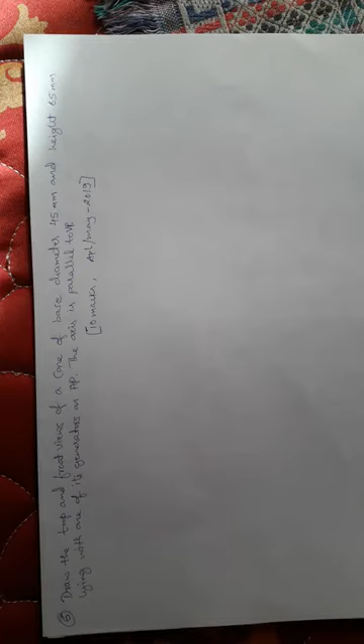Dear student, this is problem number 6. Draw the top and front view of a cone of base diameter 45 mm and height 65 mm lying with one of its generators on HP. The axis is parallel to VP. This is a 10 marks problem. This question was asked in April-May 2019.

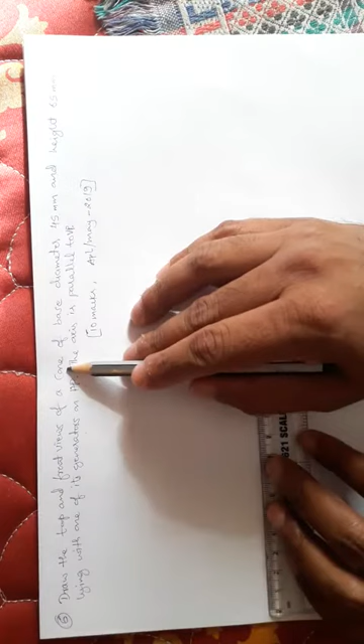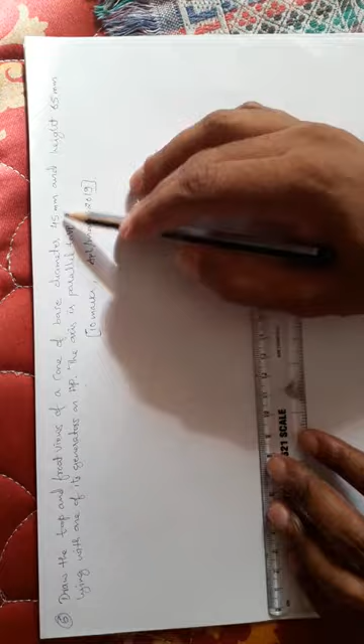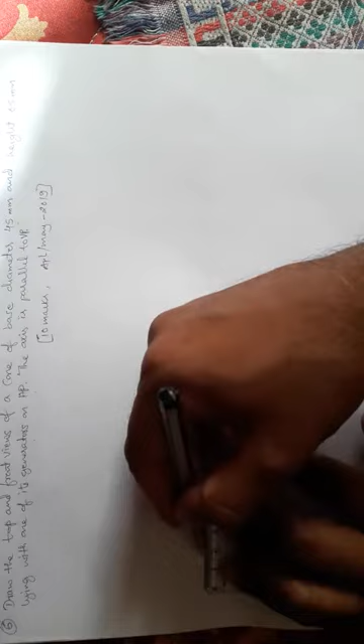So the problem is based on a cone and its base diameter is 45 mm. That means if the diameter is 45, we should take 22.5. Now I am going to draw the XY line. X, Y, and this is VP by HP. So the base diameter is 45 mm. I am going to take the radius 22.5.

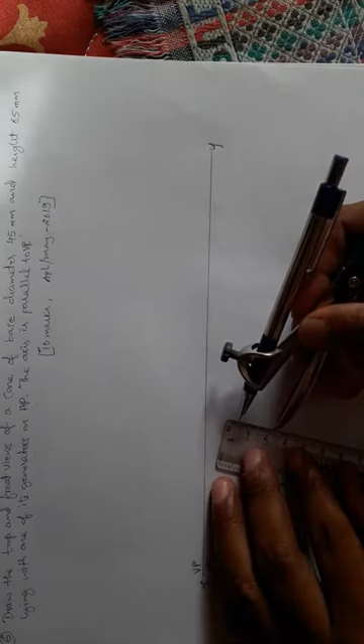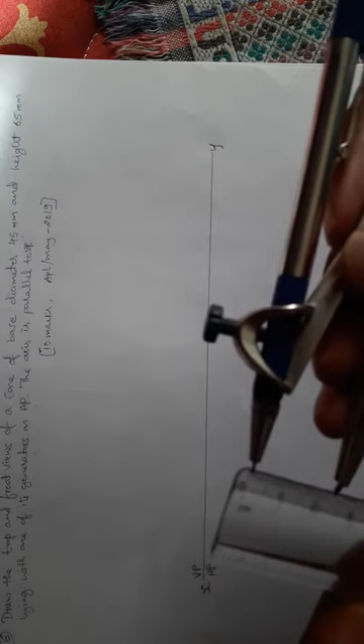So this is the 22.5, from here to here 22.5. I am going to make a center point. Okay, draw the circle of diameter. So this is the 45 mm diameter circle.

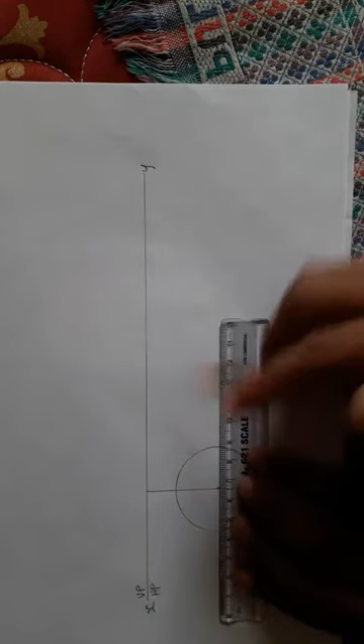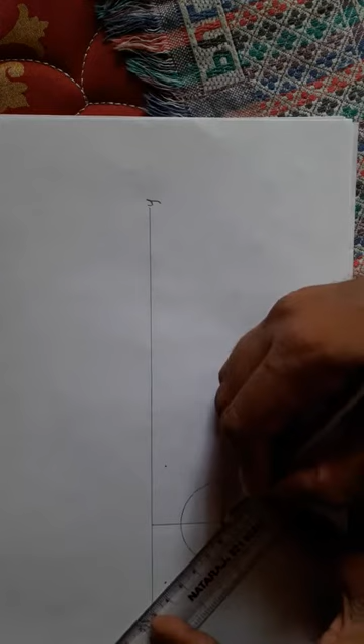From this center point, draw the vertical line to meet the XY line. The vertical line should be perpendicular. And draw the horizontal line from this center point, parallel to the XY line. So there are 4 points, and here I am going to make one more point: this is the 90 and this is the 45. Similarly, this is the 90 degree, 45 degree. I am going to make another line for reference purpose.

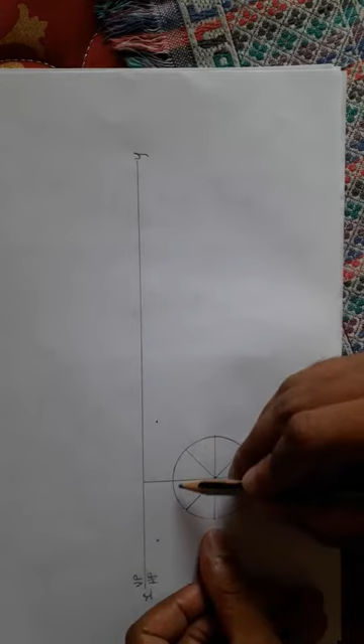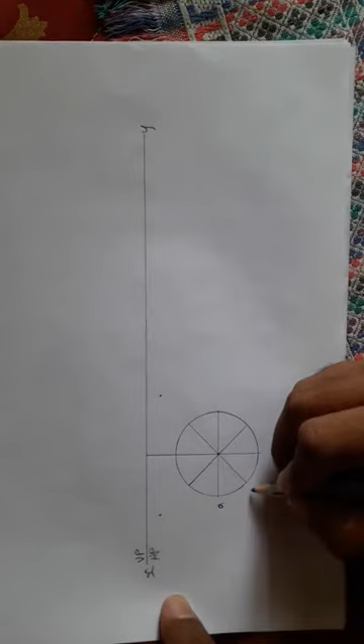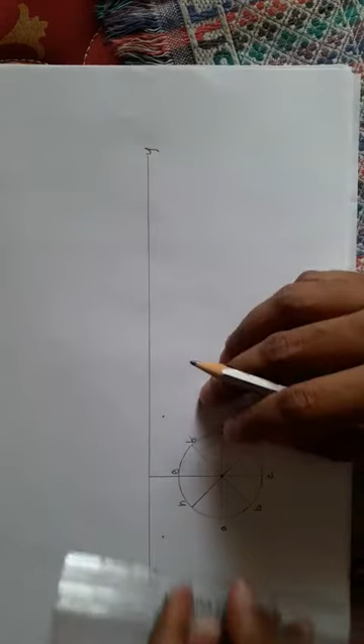So how many points have we divided? 1 2 3 4 5 6 7 8. In this problem I am going to make 8 equal parts. In the previous problem I made 12 equal points. You can divide into any number of points, but it should be 6, 8, 12, 10 like that. So this is point A, B, C, D, E, F, G, H. Draw the vertical line from each point to meet the XY line.

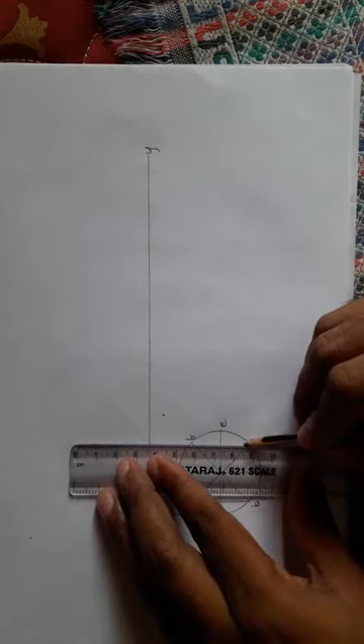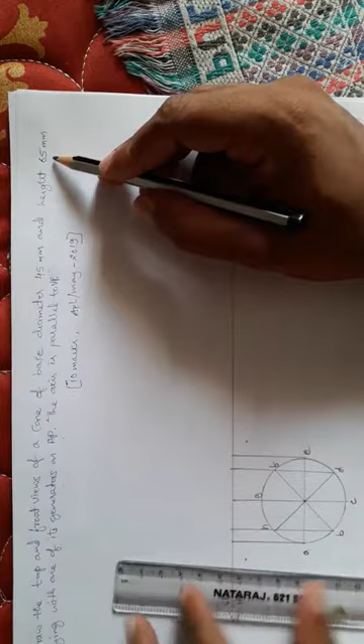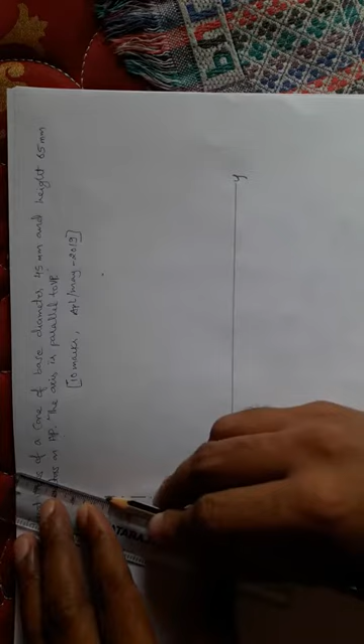So these vertical lines are projection lines. This is the center point. From this center point we are going to draw the vertical line at a height of 65 mm. Similarly draw the lines joining to meet at the vertical height of 65 mm from both ends.

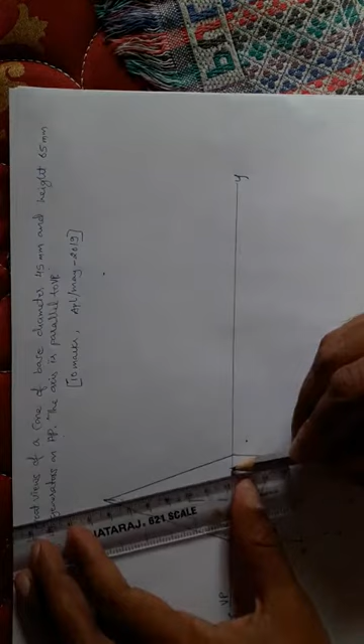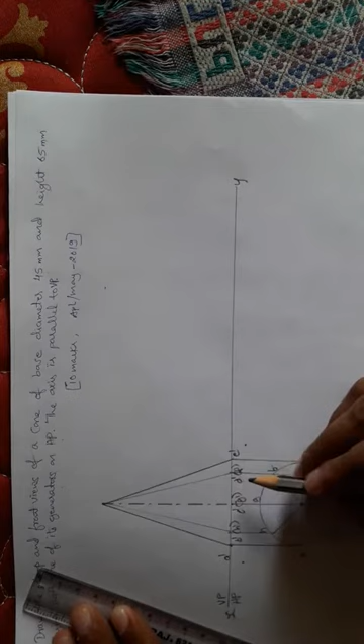So A dash is a visible point, B dash visible point, and H dash is an invisible point. C visible point, G invisible point, which should be written in bracket, D visible point, F invisible point, and E is also a visible point. F should be written in bracket, that is an invisible point.

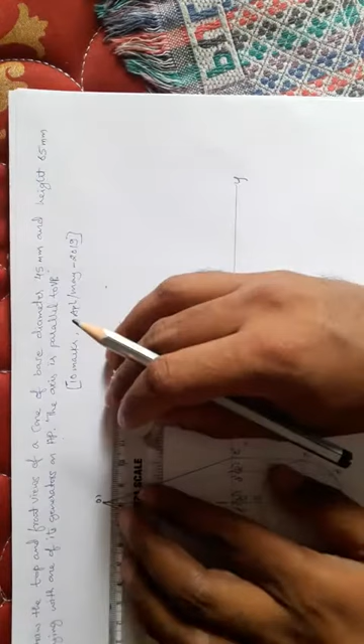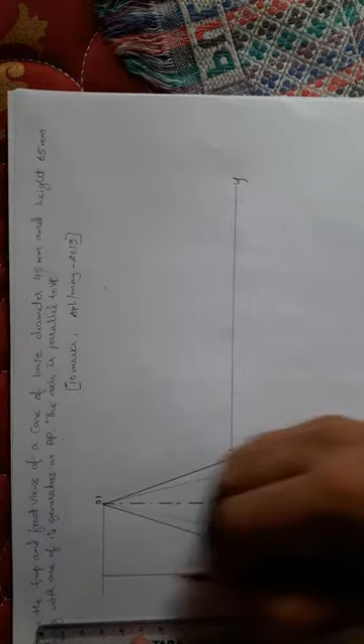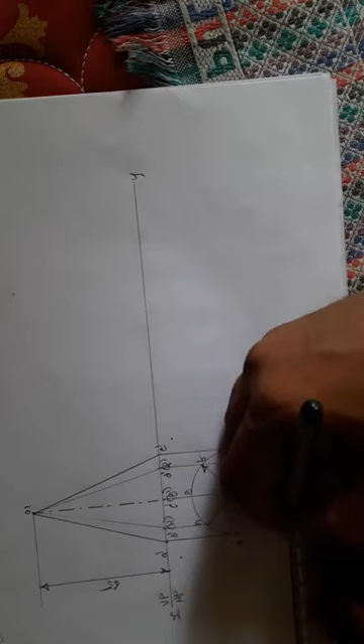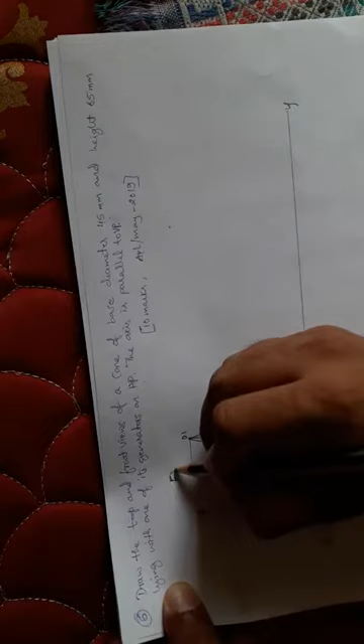So this is O1. O1 is the front view of the cone apex, and from here to here the axis height is 65 mm. The diameter of this cone base is 45. So this is the first stage of the front view, and this is the first stage of the top view.

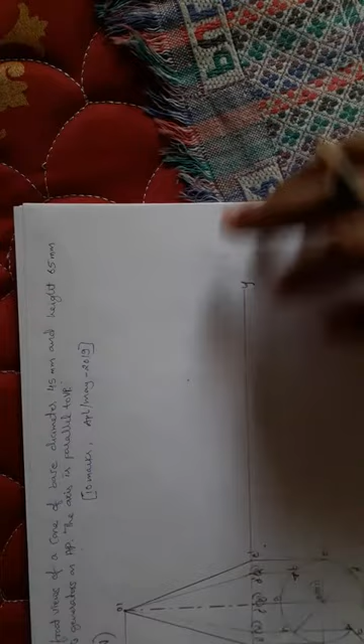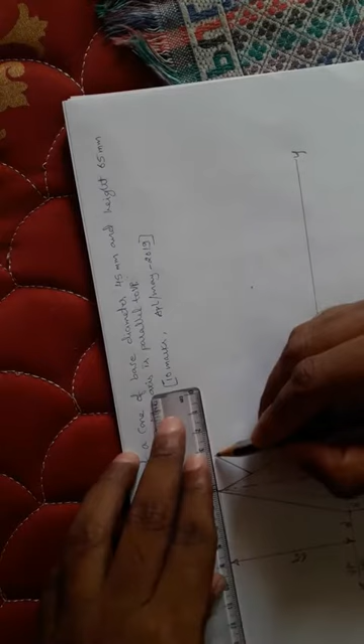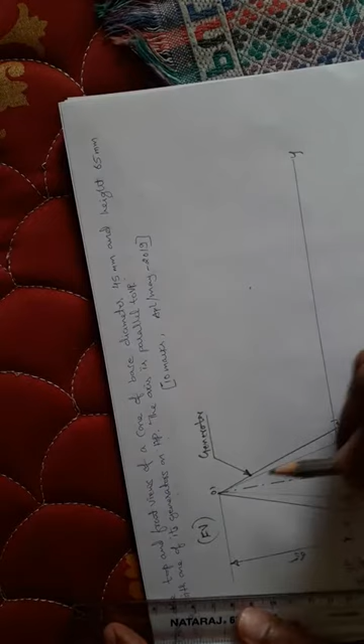Now let us draw the second stage of the front view. In this second stage, the generator of the cone is lying on the HP. That means O1 to E is a generator. So this is the generator of the cone, and this generator will be lying on the HP.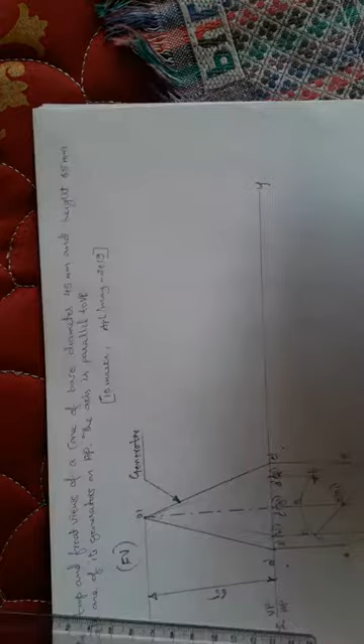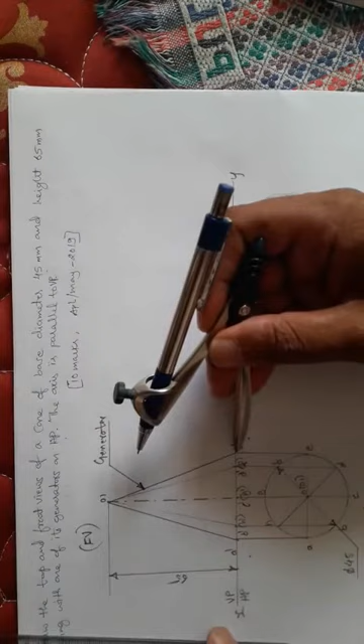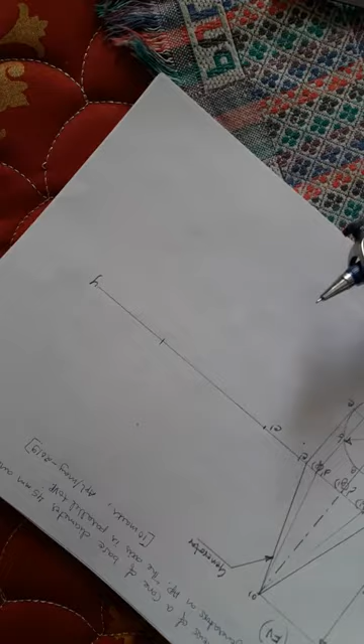I don't know the distance from O to E, but here I am going to make one point, called E dash. I am going to take the distance from here to here, that is E to O, and mark it from this point to this point. This point is called O dash. So E to O dash, this end generator is lying on the HP. That means this line will rest on the HP.

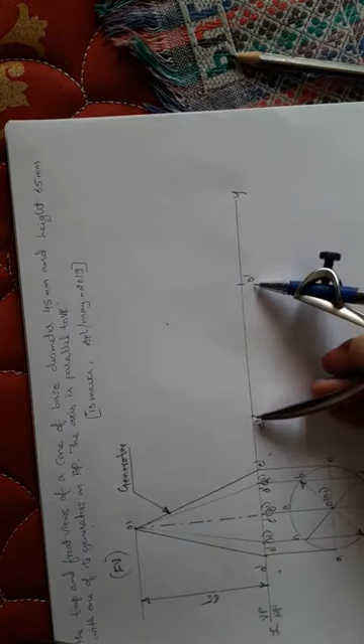So with the same distance E to O, mark, and take the distance from E to A. So this is point E, and mark. This is O and E, and E to A. So this point is A dash. Join the line from E to A and A to O. So this cone will rest on the HP.

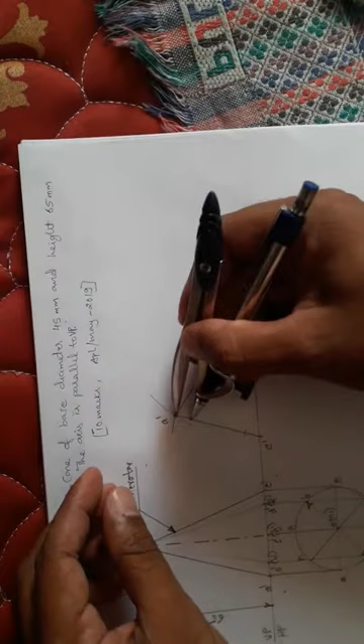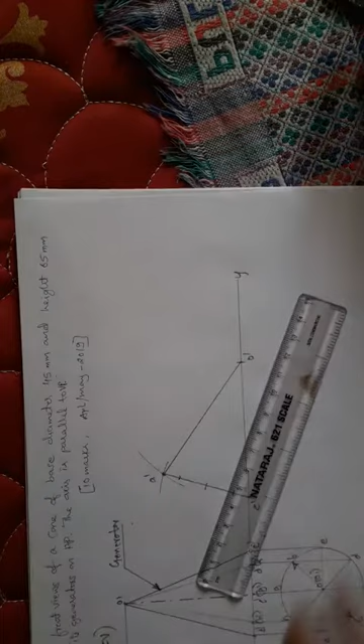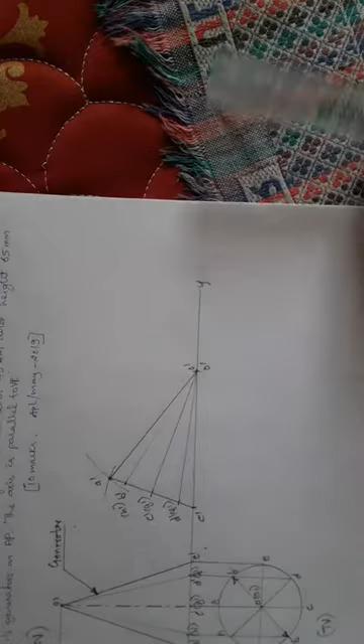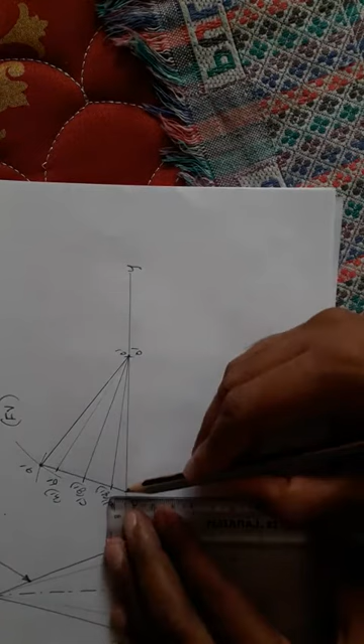Similarly we take the distance from E to D, the same distance from here also, and E to C. Draw the line; it should be a thin line. So this is B dash in bracket H dash, C dash in bracket G dash, and D dash in bracket F dash. And this is O dash. So this is the front view of the second stage. The next procedure is to draw the vertical line from each point of the second stage front view.

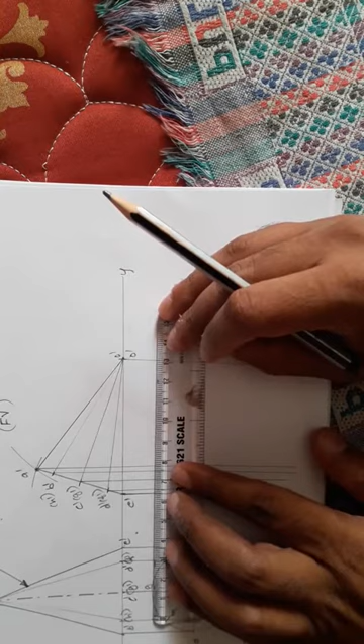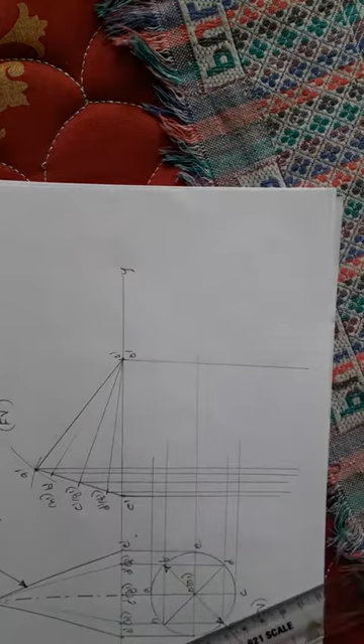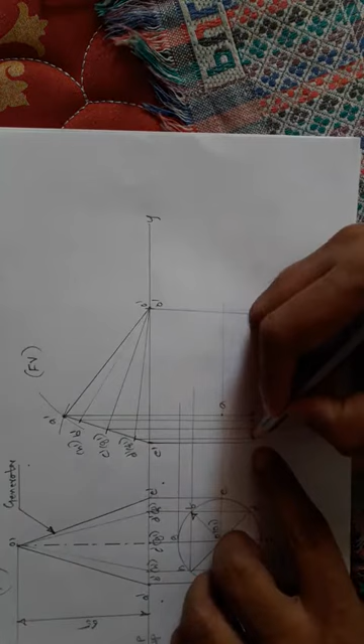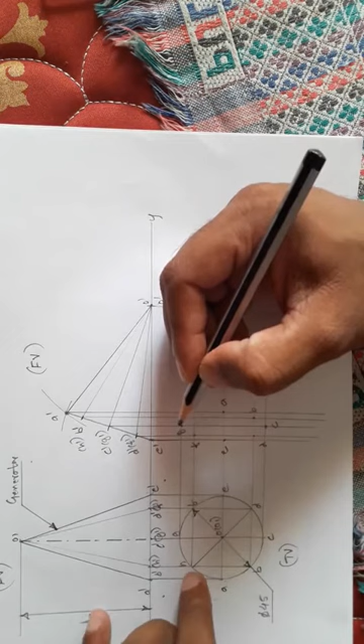Next, draw the horizontal lines from the first stage of the top view. Here I am going to coincide the 2 points: this is point A and this is point A. These 2 points coincide here, that is A. Similarly B, and C, this is point C, and D, this is point D, and E, so this point is E, and F, and finally G. And this point is H.

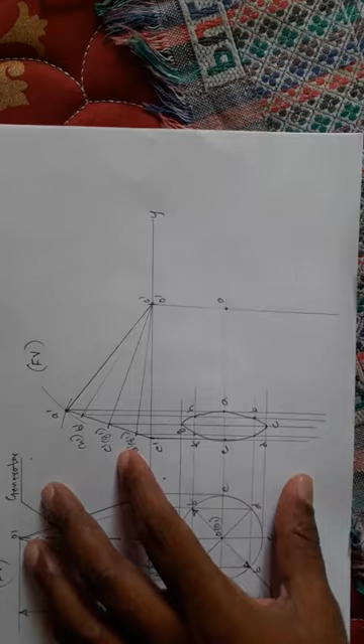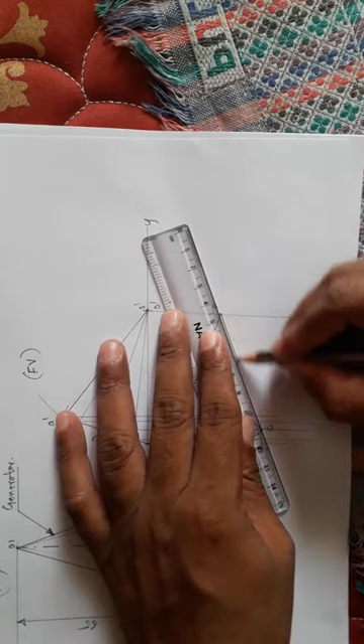So this is center point O to O. The base circle above is a visible line, and the upper part of the end generator is also a visible line. Draw the curve to meet every point, and draw the tangent lines to the ellipse. So this is the ellipse. Draw the lines to meet at its ends. So this is the top view of the second stage. Okay, thank you.